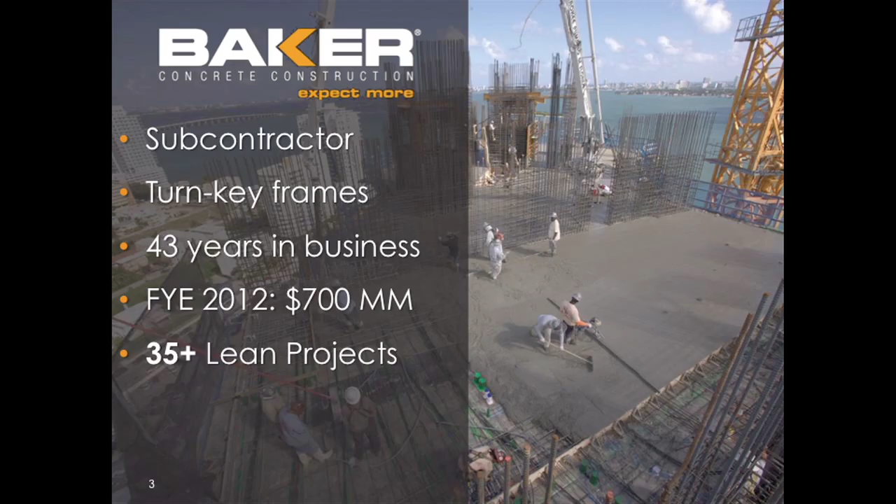So who is Baker? What do we do? Just real briefly, we're a subcontractor. I used to say it was a trades partner, but we haven't done an IPD project yet, so we're still a sub until we get our first IPD job. Turnkey frames is what we build. We build stuff out of concrete. 43 years in business, $700 million last year. Done 35 plus or minus lean projects.

So the potential of lean. I was actually quoted in ENR this last week on a Turner safety article that came out about a stand down about 50-20-20, saying lean has delivered for us easily 50% fewer injuries. We can do them 20% faster, and we can save 20% in cost. And the cool thing is you don't usually just get one or the other of those. Usually you get all three if they're doing it well.

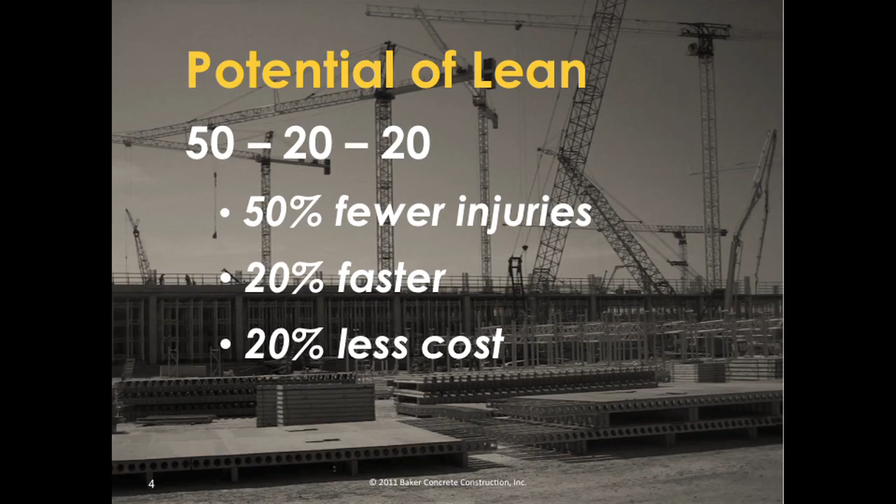And those numbers are actually fairly ratcheted down. The first year of safety, we had a 78% safety advantage for jobs that were doing lean than jobs that were not. We've done things 78% faster in formwork and things, and costs have been 50% better in some areas. But those are good averages.

But it harkens back to something I heard Greg Howell say in a presentation, paraphrasing, he said, if there's anything I've learned about lean over the last 20-something years, it's these two things. One, lean is hard to do. Lean is hard to do. And two, results don't sell. So we'll see where these results go today. And I would agree with Greg that lean is hard to do.

So our journey, real quickly, started looking into lean in 2005. 2006, attended a 2-day seminar that Greg and Glenn put on in Cincinnati. 2007, we decided to pilot it in the Midwest on one project. 2008, because of the success on that project, we decided to make it a regional initiative in the Midwest region, right around Ohio. 2010, expanded it to the Mid-Atlantic here in DC and South Florida.

So the case study that I'm going to be talking about happened in between there. It basically happened in 2009. Last year, expanded it to our southern region, which is mainly the Gulf Coast.

So to give you a little bit of background on this case, I'm going to explain a little bit about our training program, not go into any detail, just give you a little flavor for it. We call our lean training special forces. It's what sets us apart. It's what sets the lean crews apart from the traditional crews. We call them our special forces. And I even lifted the Army logo for special forces and changed it a little bit.

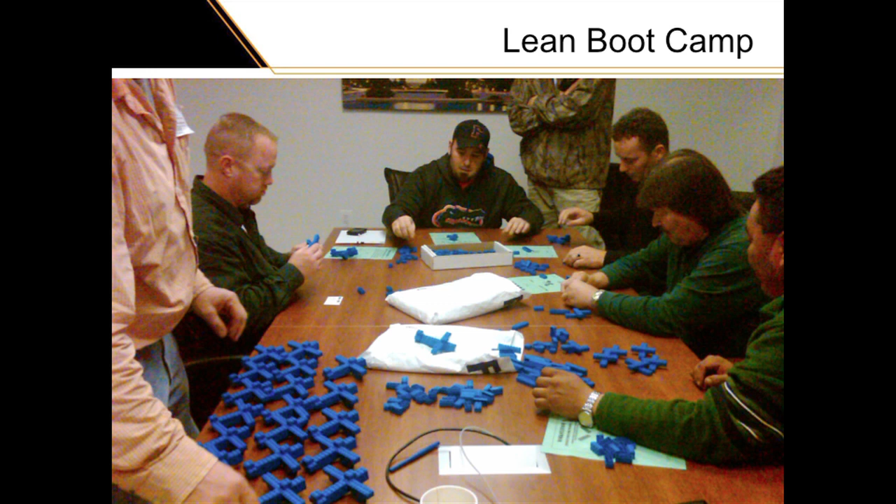We play Legos. Sitting at that table are 3 foremen, a superintendent, a project engineer, a line and grade engineer, and a project manager, building airplanes to learn the lean philosophies. The last planner meetings, a lot of written, a lot of coloring on the board. You see them coloring in some things. We do a lot more coloring than we do sticky notes. It just seems to resonate more with our crews.

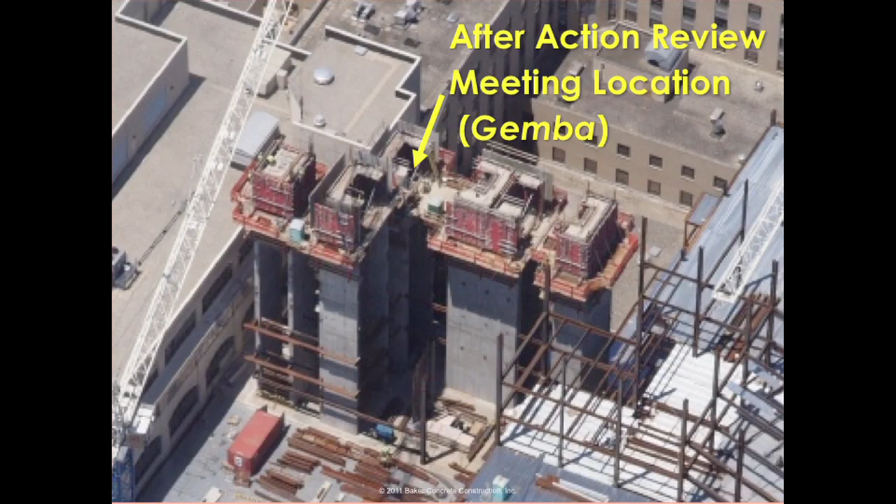After-action reviews, this is a crew conducting an after-action review at Gemba, at where the work is, where the value is being added to the work. And they're 9 stories up in a concrete core, not back down on the ground in a trailer.

So here's the case itself. It's ThyssenKrupp Steel Mill, Mount Vernon, Alabama. Our crews lovingly refer to that as LA, Lower Alabama. Huge project. It's literally 5 miles from one end to the other of it. We poured overall on that site 415,000 cubic yards. Big chunk, yeah.

The case study, if you can see there, is those 2 buildings. They're starting to take the shape of each other, and they're actually identical buildings. For all intents and purposes, they're identical. And they're about 50 feet away from each other on the same site. So they're hot dip galvanizing lines, they're big equipment foundations. The one with the blue arrow was done traditionally. The one with the yellow arrow was done using lean tools, lean processes.

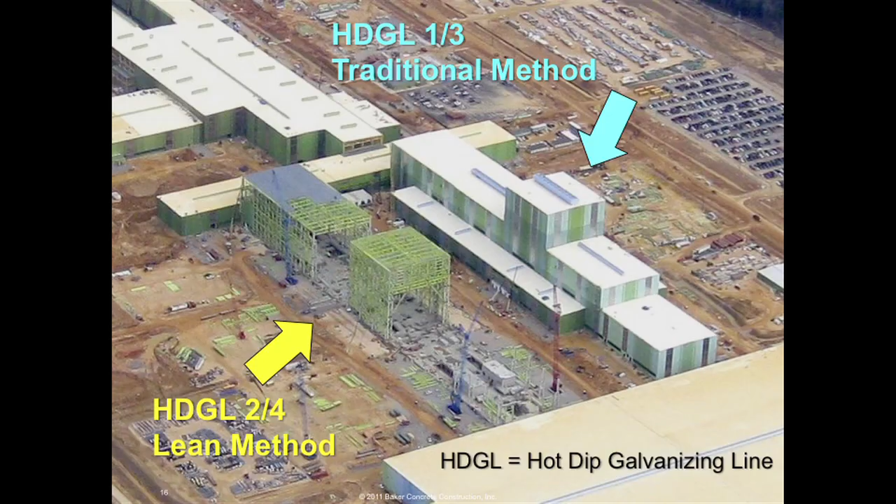So the situation, those packages were our 5th and 6th packages that we had gotten on the site. Took our contract on site to over $210 million. We actually had 985 craftsmen at one point on the site, big site. It depleted the resources of our industrial group. They were scrambling for people, but it was good work, and we needed the work at the time, so we were really scrambling to get people.

So when we bid this last chunk, we got a call saying that they're not going to give us this job unless we can prove that we can staff it with people that aren't already on the job. They didn't want us to water down the other crews and then have them fall down on their faces. So a call was made up to the Midwest. I had some people available. I said, sure, I'll loan you 2 of these guys that I have. And the 2 guys are these 2 guys, Jim and Joe. So this is really a story about Jim and Joe.

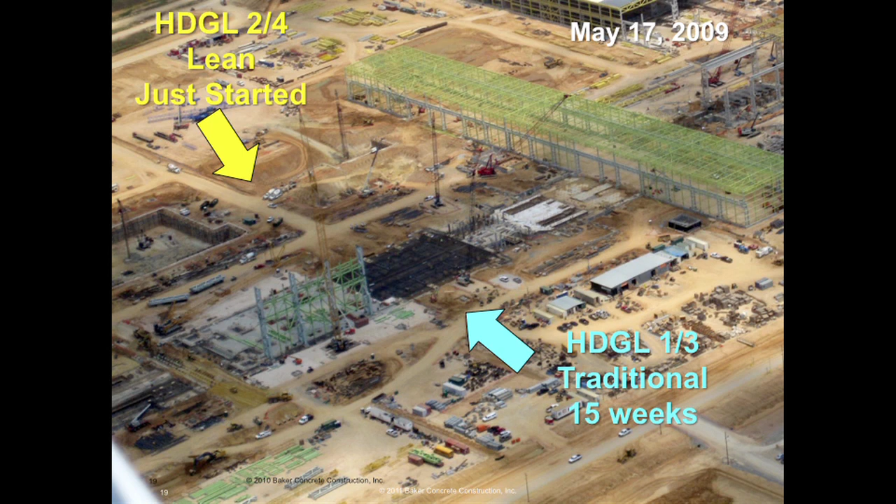So this is what the site looked like when they got there, May 17th, 2009. You can see the traditional line in blue. There's some work that's already in place. You can see some concrete's been poured, and there's actually structural steel being set. You can see 1 bay of steel is being set vertically. If you look up on the yellow piece, there's a couple holes that have been dug. That's just getting ready to get started. So that's what they were sent for.

All right, this is one of the new things to the presentation. The Do Lung Bridge. Does anybody know where the Do Lung Bridge comes from? It's a movie, 1979, Apocalypse Now. Great movie, I love the movie.

So the movie Apocalypse Now, the story, if you haven't seen it, is they're going up this river in Vietnam. They're supposedly supposed to cross over into Cambodia. And they get to this last army outpost, which is the Do Lung Bridge. And as they're pulling up at night, there's all this chaos going on, and there's just shooting and flares, and there's actually soldiers swimming out with suitcases saying, take us home, this is a disaster, and they kind of shoo them away, and they dock.

They go walking around there, and they're looking around, and they just see this thing, it's just in chaos. They're shooting randomly. They're told that they have to rebuild the bridge every day because they blow it up at night. And it's just a mess. So I'd say that most of our traditional jobs, they're much like the Do Lung Bridge. They're just in chaos. They're like, who's in charge, you know? And they don't know who's in charge. They're firing randomly.

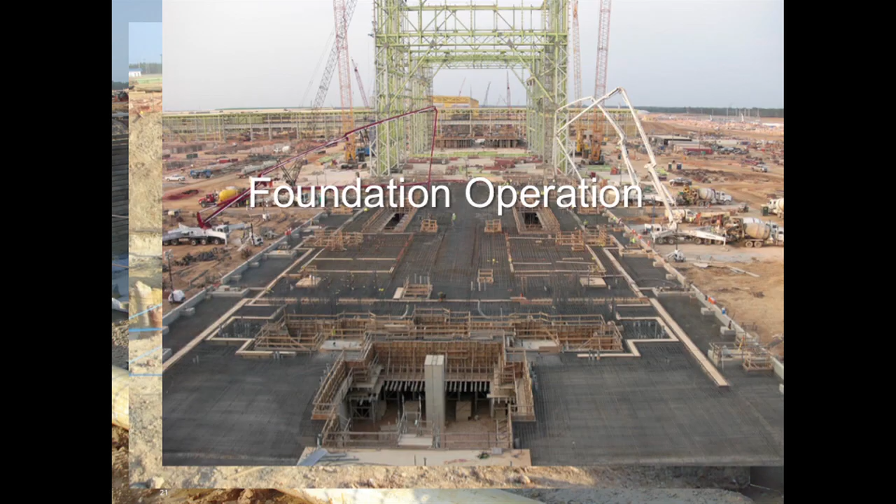So when they get there, they're seeing the Dulong Bridge is what's happening on the one side. So what are we doing there? We kind of take the hole looking like this. It's been sheeted and shored with the soldier piles and lagging. There's caissons drilled, and that's where we start. We start building the foundations, the bottoms of the equipment foundations, and then eventually we get it up to grade level. That's our job.

And just looking at that picture, you can tell that it violates batch integrity. It's a huge batch. It was, I forget how many thousands of yards it was, and they said it took them like 2 days to pour it. They wish they had broken it apart. This was the traditional line, by the way. And you can see the structural steel being set in the background behind the pour, right up against the concrete.

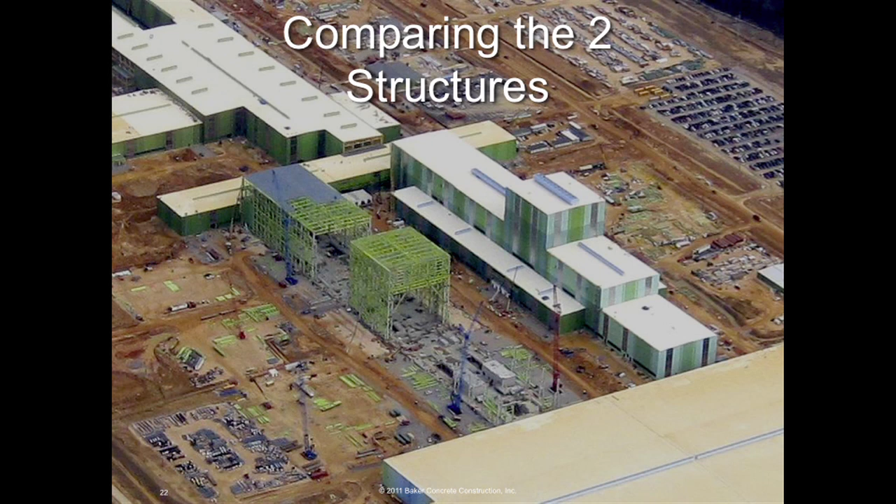So looking at the two structures, similarities, they're basically identical. 100,000 cubic yards on one, 100,000 cubic yards on the other, 50 feet apart. So the site and the weather are the same. The suppliers are all the same rebar suppliers, same steel suppliers. The engineer and the customers were the same and not lean. We were allowed to put one person that could look over both, and that was the superintendent. He could run both sides of this.

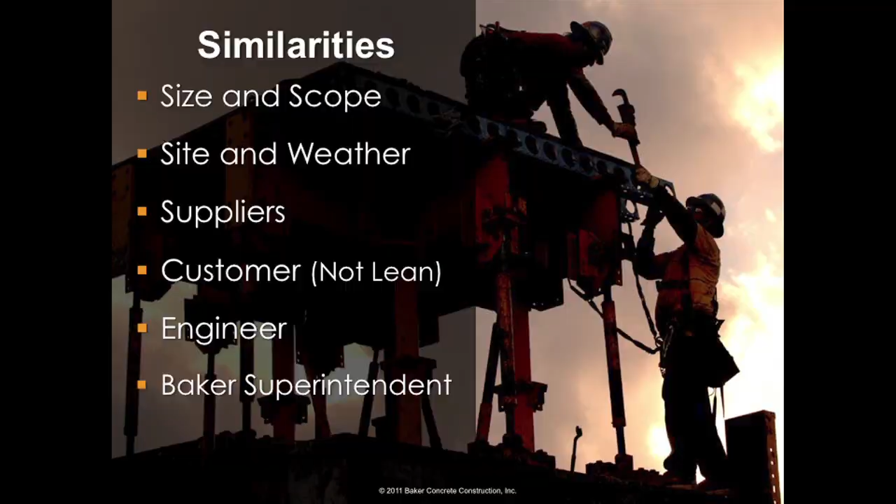So the differences, and there were some. The lean job started 3 months after the traditional one started. So the traditional one had a 3-month head start. The labor pool, the lean project got the bottom of the barrel. That was the last project to go on this site. So craftsman number 800 through 985 were the ones that went to this job. They didn't get the first 500. There were some lessons learned. They did some things out of sequence on the first one, and there were some design changes. So there was a little bit of lessons learned already from the original one.

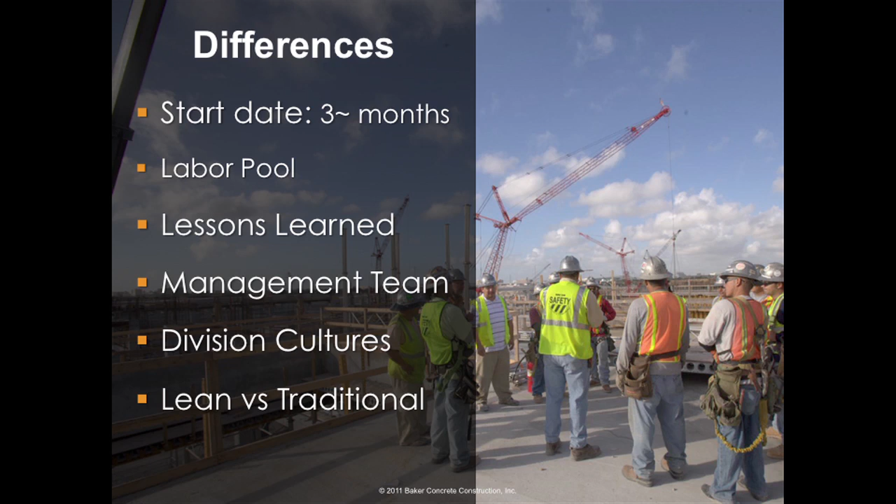The management team was obviously completely different. One was an industrial group, one was a commercial lean trained group. The division cultures were very different. When the guys came and said they're going to try to teach them to do lean, I thought they were crazy. I thought they were going to get run out of there because it'd be something like Air Force guys going to tell Marines how to fight, and it just wouldn't work. So, and obviously the lean versus traditional.

So what did Jim and Joe actually do? They convinced the superintendent to try something new, and that was last planner, basically. Pull planning, weekly work planning, get your act together. They brought in suppliers to help create these new delivery schedules, and they did it collaboratively. And they conducted lunch and learns. They started teaching them these Toyota Way principles to help them with what they were doing each week.

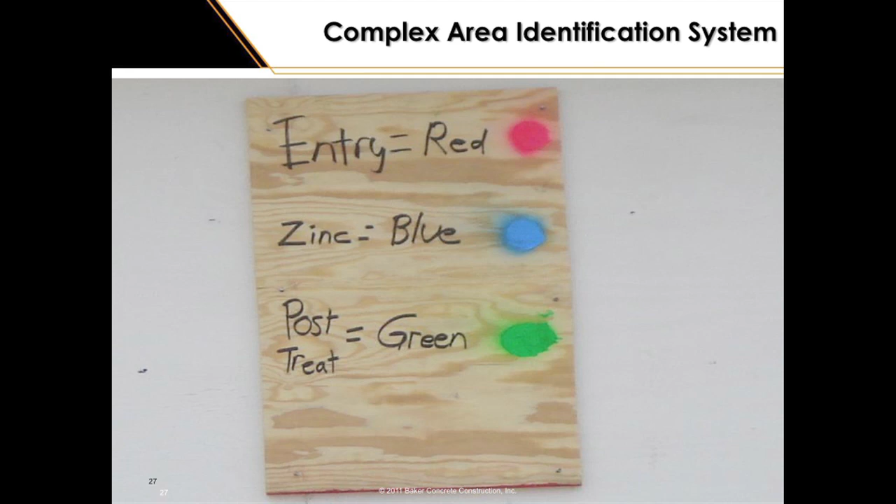Yeah, so they said, what's your problem? And they're like, we can't find anything. There are acres and acres and acres of rebar and anchor bolts and embeds all over the place. And they said, we got to clean it up. We got to start sorting it out. We got to start putting stuff in the right areas instead of just chucking it wherever you can. Like if you were on the Dulong Bridge, that's what you would do. You would just throw it off the boat.

Embeds coming from a supplier, we had them pre-color code these when they came to us, so when the forklift driver took them off, he knew exactly where to go put those. He didn't have to look up a shipping ticket or anything like that. As we were building up formwork, we were even color coding that, so we knew which piece of the mill it was supposed to go to. Plus, the superintendents and foremen really liked that too, because they could tell when somebody was stealing their forms, and that does happen.

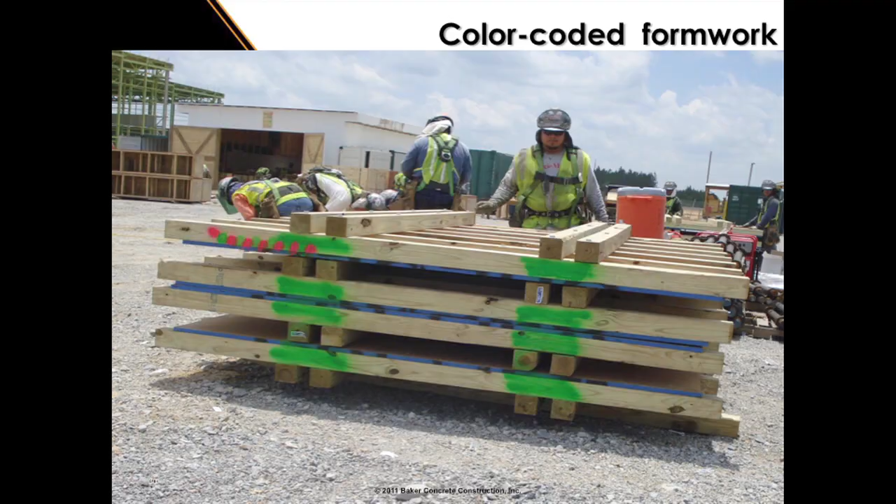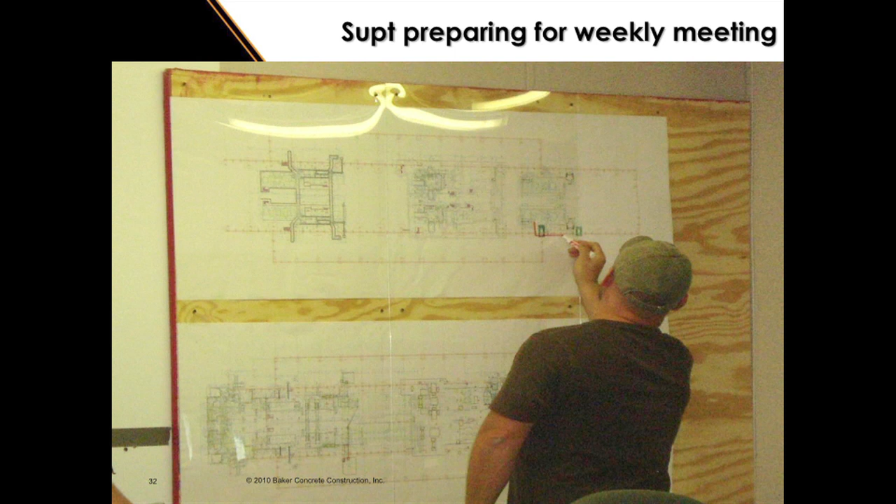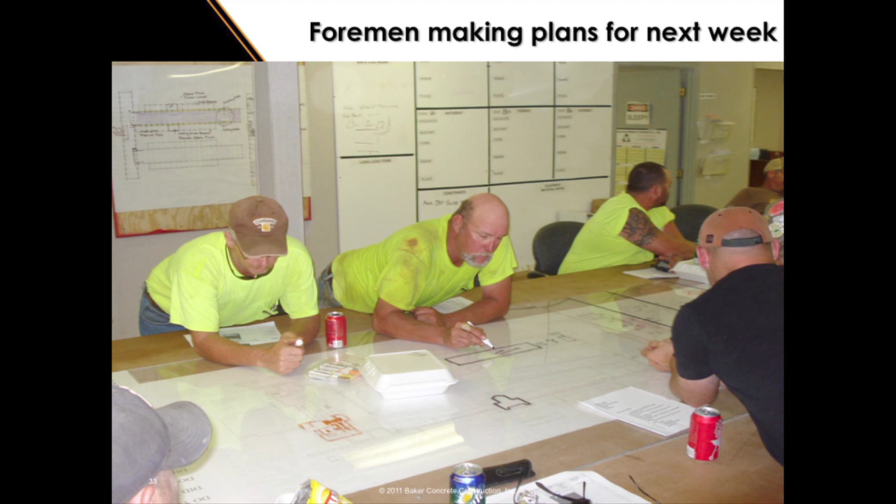Then the superintendent or the foreman would come in. They actually put a piece of plexiglass on their table, and they would slide the drawings underneath there, and they would color what they were going to get done next week. This was kind of neat. A foreman had some downtime, and he brought his crew in, the foreman being the last planner in the high-vis yellow, to explain to them what was going on based on the coloring that they had done in the meeting the day before.

The guys on the lean project were planning their work, and they were executing it in 8 hours, and they were getting to happy hour. The guys on the get-her-done, Dulong Bridge side had their hair on fire. They're running around. They don't know what they're doing. They're pouring at 8, 9, 10 o'clock at night, and they're not getting to the bar for happy hour. And when they finally get there at 10 o'clock at night, the lean guys had been there for 5 hours, and they're plenty sauced by then, and they're jealous. So jealousy plays a big role in lean.

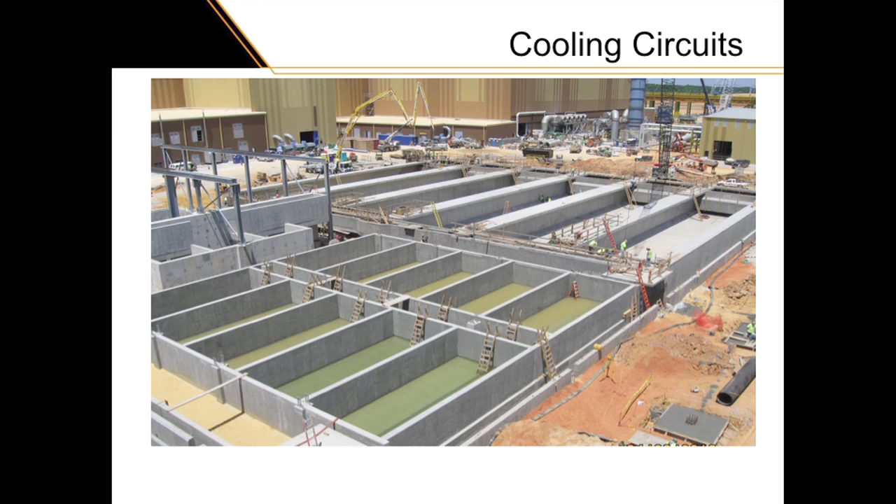Cooling circuits, this is one of the other chunks of work. I told you there were 5 or 6 other chunks. This is one of them, the big baths where they take the steel molten hot and cool it down. So they were one of the teams that came in. That little red circle was what that picture was of. And so it's those blue areas.

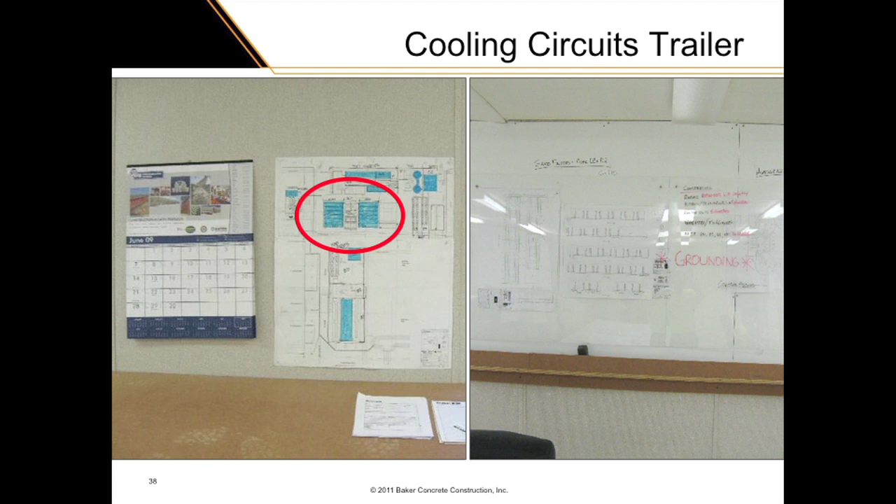So they came to the lean trailer and looked around and saw some of the things and the writing and the plastic and the calendars and all this stuff. So they said, that's going to get us to the bar sooner. That's what we need to do. So they bought calendars, they bought plastic, they colored drawings, and they couldn't realize why they weren't getting to the bar any sooner. They did everything that the other guys were doing, right? Wrong. They didn't have Jim and Joe. That's what they didn't have.

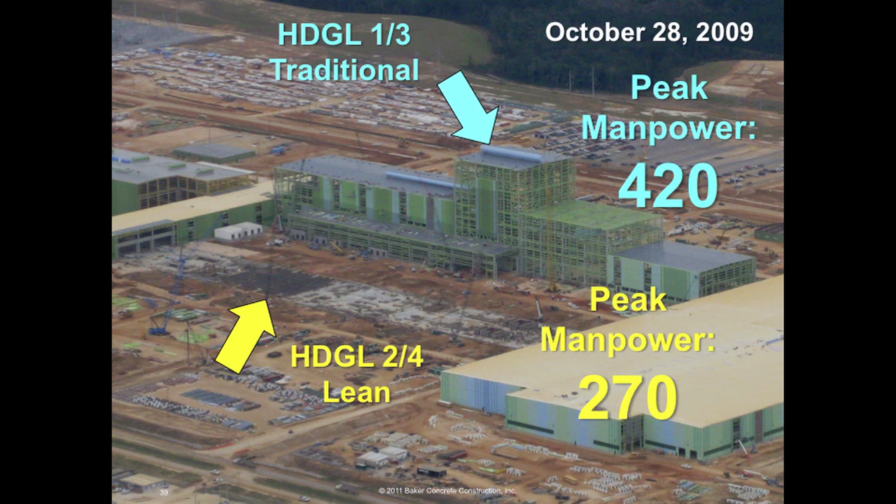So here it is on October 28th. The inside had just finished pouring, and the lean project, you can see where the arrow's pointing, is actually the last pour on that line. They finished within a week of each other. And the one, remember, had a 3-month head start. Peak manpower. The traditional project had 420 at its peak. The lean project never had more than 270.

That wasn't a fun day, but they took pictures, they did an after-action review and figured out why they had this mistake, and they didn't make it again the rest of the time. So it brings me to some lessons learned. You can roll out lean at any stage. This was the last in the line of the projects. You don't have to follow the playbook exactly. Again, we like to color versus filling out weekly work plans.

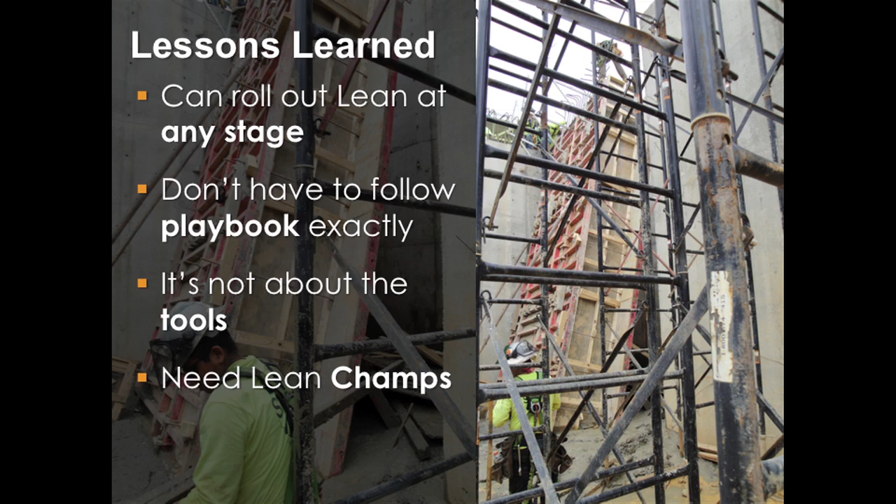It's not about the tools. Obviously, it's not about the tools. It's really about those lean champions that drive it. It's about the Jims and the Joes. So if you want to know how do you sustain lean, and sustaining it is actually very, very hard, my answer is create champions.

Don't roll out tools. And when I go to coach teams, I don't say, I'm here to roll out Last Planner, I'm here to do pull planning. I'm here to make a champion. Who wants to be it? Which one of you at this table wants to be the champion and take this when I'm gone? Yeah, I'll teach you all the stuff in the sticky notes, but that's my mission when I go to a project, is to make Jims and Joes.

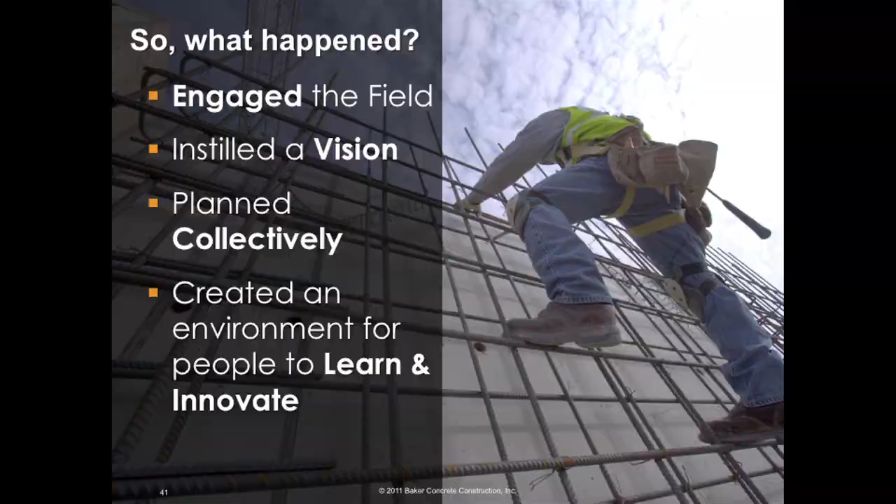So some results. Safety record. Actually, both projects had almost the identical safety record, but when you compared it to the rest of the company, it was 65% better than our 2009 company average. Formwork rental, they used 75% less formwork on the lean project as they did on the traditional one, because they had time to recycle it and go back and get it instead of just leaving it behind. Yeah, we do that. Equipment rental, they used 28% less equipment, less lifts, less generators, because they were able to share. Everybody didn't have to have their own thing.

The duration, it was 19% faster, the completion date, and the TK owner's rep said it's the fastest one ever built anywhere in the world. And they've done these, I think, in Russia, China, India. End of job overtime. This is the hair on fire at the end, flood the job with 400 people. 68% difference in end of job overtime. The traditional crew was just going crazy at the end trying to finish, and the lean crew just kind of walked across the finish line at the same time.

Labor productivity, 12% better labor productivity, cubic yards per man hour. Costs, depending on the area or the activity, the way we had it broken out, the least amount of savings we had was 10% on an activity, and we had as much as 28%. When you rolled it all up into the whole project, the cost difference was actually 17.4%. So not quite the 20% that I said before, but close enough, right?

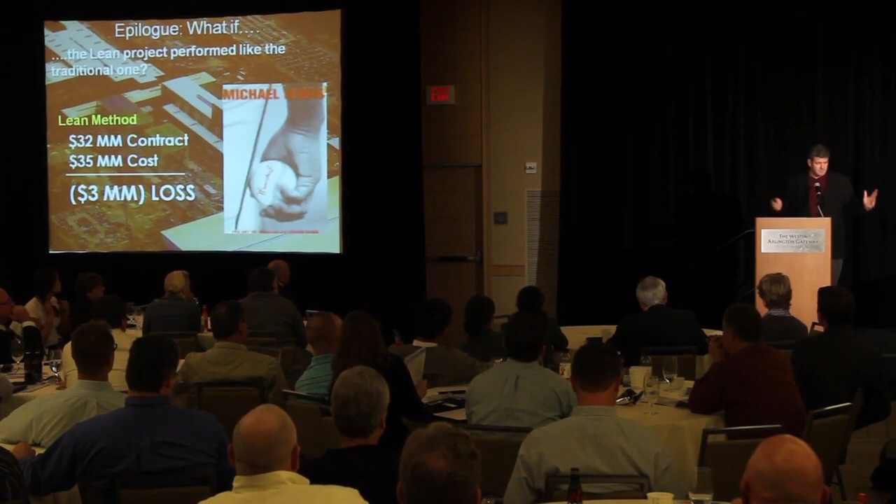So I like that book, Moneyball. Has anybody read that? Great book. It talks about statistics and how they can be bent, and make sure you're looking at the right thing. Make sure you're looking at the cost delivery on the project, maybe not the bottom line. It may not tell you the whole story. Just a caution.

Biggest obstacle to lean. I found this, and I like this. The greatest obstacle to discovery is not ignorance or lack of intelligence. It's the illusion of knowledge. We already know how to do this. We've been doing lean for years, blah, blah, blah. No, it's thinking you already know it. You're thinking you already do it.

Cautions: just know that lean requires discipline, perseverance, hard work. That's again why Greg said lean is hard. Results don't sell. Teams have to devote time and energy to making it better. Oops, sorry, went too fast. Payoffs are down the road. Lean is not a car wash, it's an investment. You're investing today so things run smoother, better down the road.

So I like, Greg used to have not this exact slide, but that question at the end of his presentation. So what is your level of ambition with lean? You can make mall cops, right? In about an hour, you can show a mall cop how to use a billy club and a radio. Or do you want to put a real investment in and really invest in your people and make something like Special Forces? Those guys don't get made in a couple hours. That's years and years and years of training.